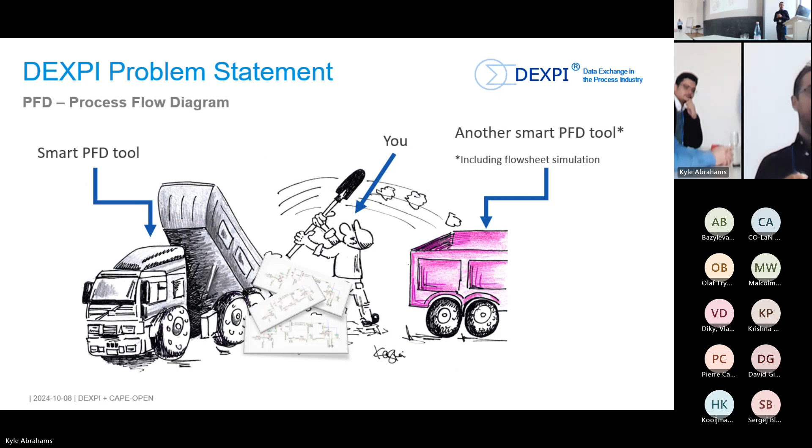So this is what we look at from the DEXPI perspective. DEXPI is an association—we have 10 to 20 full-paying members. We were founded last year in October, so we're one year old. We have a history, of course, and so far we've focused on the P&ID, the later diagrams in the engineering lifecycle. But now we're moving in the direction of process, where we have the PFDs as well.

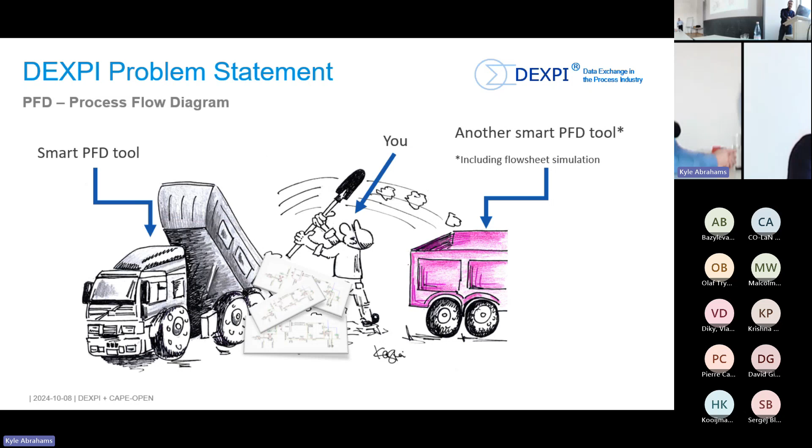This is where we want to start an MOU or cooperation, to look together with CO-LaN at how to enable customers to have simulation combined with PFD tools and P&ID tools, to cover more of the whole life cycle using digital tools. That's my part, and I hand over to David, who will give an update on what he started last year.

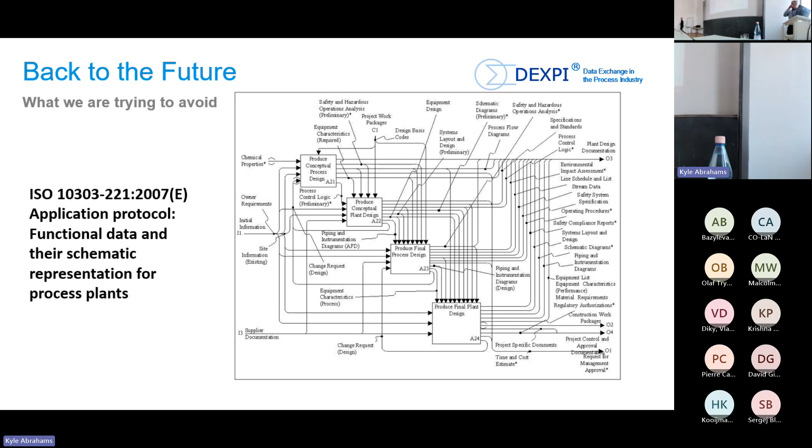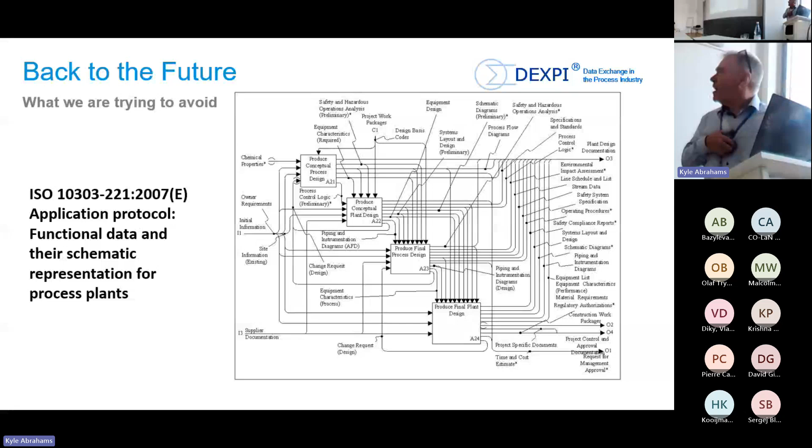Okay, so to motivate discussion, I discovered something lurking on my hard disk called ISO 10303-221:2007, which was trying to describe how we do process engineering. This diagram from hell is what we're trying to avoid by using DEXPI, where you have layers upon layers of documents flying in all directions in your project.

A lot of these slides were actually taken from last year, because last year I gave a presentation on what DEXPI process was, and came with some questions around CAPE-OPEN. What's happened since then is that a couple of people involved in process simulation have been prototyping, trying to see whether simulators can interact with DEXPI process. There are some results on the way which are quite positive—the people doing it are AVEVA and DWSIM at the moment.

Now, the lesson following up from Gregor's comment is that DEXPI is a data model, not just a data exchange format. He started off saying we need to do data exchange for P&IDs. What we see is that the thing more interesting for engineering companies is actually that we need a good data model for the plant.

And so I've got my drawing from hell, which shows complicated structures. But what I'm trying to show here is that DEXPI process, the standard for describing processes, and the old P&ID model, now branded as DEXPI plant, give you a way of defining a topological model of your process design and plant design that you can link together, and move through the phases of process design from concept through to putting the maintenance functionality you want on the equipment—using the classes in DEXPI process, and then the classes in DEXPI plant to create your plant model.

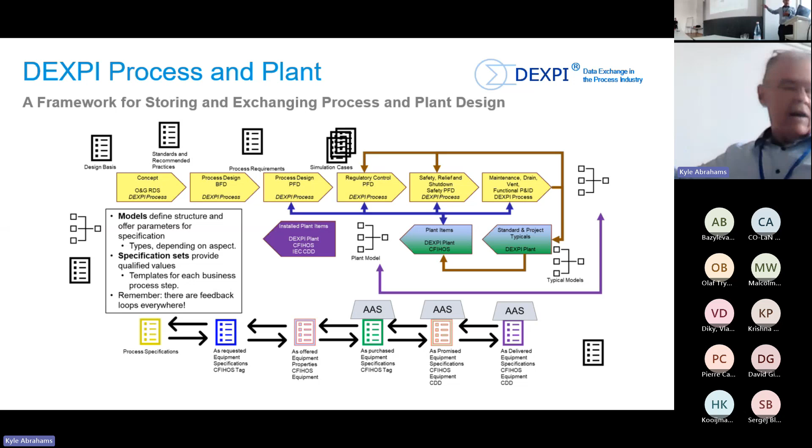You then take the specifications, perhaps throw them into an Excel file, then turn the handle on the simulator, and then the simulator has its own proprietary tool to throw those results back out into Excel, and then your cases are then carried onwards by whatever manual approach you have to put it into your engineering system.

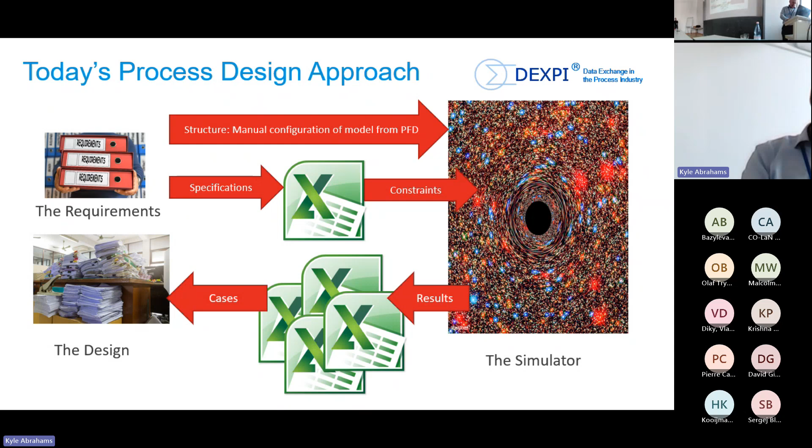The first way you look at it is, what does it do? That's your process design. That's where DEXPI Process helps you with that. Then the other aspect is, well, what is the plant? What equipment do you have there? And that's where DEXPI Plant, the P&ID model, is actually the thing that structures your information.

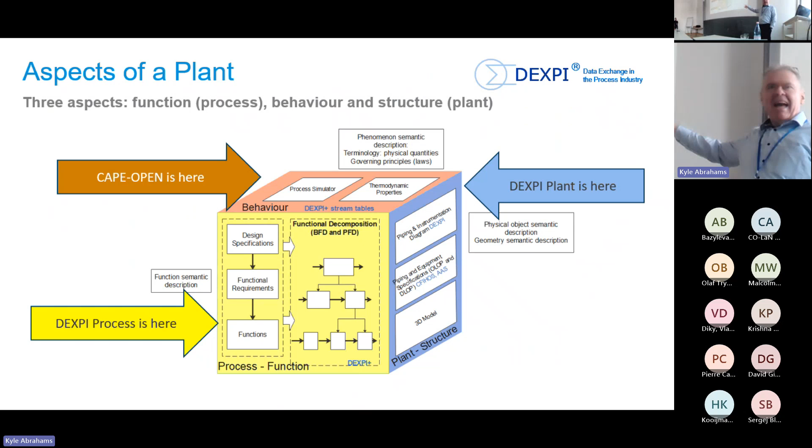But then the next question is, well, what does a plant do? Actually, how does it behave? And that's where simulation comes in. And that's where CAPE-OPEN is, about linking the process simulation and the thermodynamic properties to the process structure and the plant structure that you have.

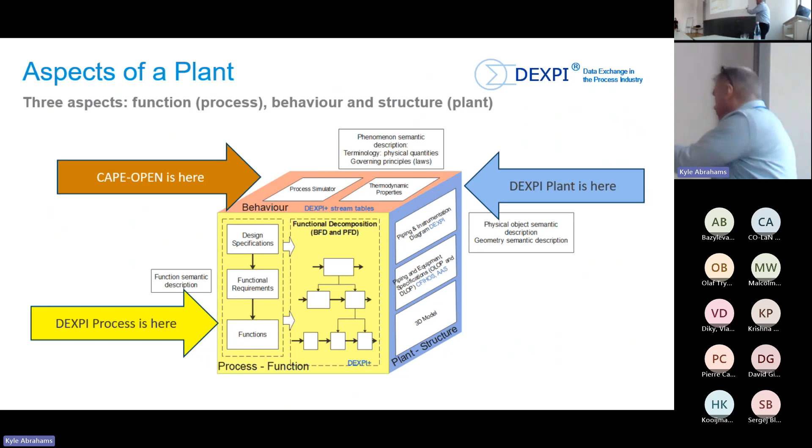Now, DEXPI Process is not rocket science, it's not a very complicated model. It's basically blocks with ports with connections between them. Sounds very familiar to simulation and to CAPE-OPEN. And we deliberately took the best out of various process modeling standards, SysML and CAPE-OPEN.

And there was a lot of background from people who've been heavily involved in simulators like Gregor and me into actually structuring the model. So what we have is a structural model consisting of process steps, read unit operations, with streams connecting those ports. What we also need to do on PFD modeling is to model a flexible stream table.

And so what we did in DEXPI Process is to build up a way of defining a stream structure for groups of thermodynamic streams based on a concept which is familiar to CAPE-OPEN, a material template, which then says what components are in that, and then you can additionally put in information about what thermodynamic methods you're going to use as a potential extension.

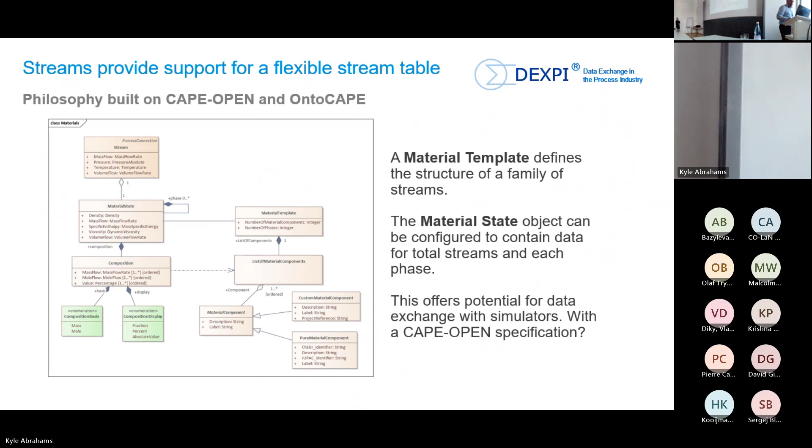Then we need some sort of reference data about process steps. And so what DEXPI Process at the moment proposes is a set of process steps, again, based on existing standards, that we believe cover large amounts of the process industry. That assumption needs to be validated. So we need help from companies who have their own libraries of unit operations to see where we need to supplement the reference data we have for unit operations.

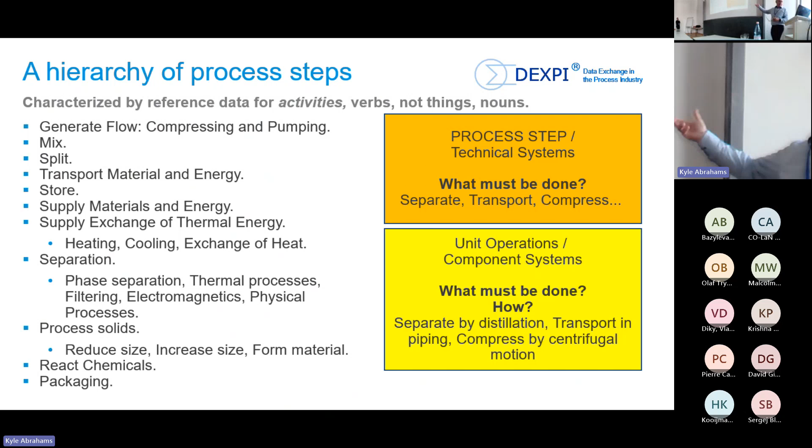So again, the slide from last year. We can use DEXPI Process files to store design cases. So the first thing we do is we define a structural model, which is a data set which says, I've got these unit operations, they are connected together like this. That then enables you to create similar files that just contain data.

And the first set of data sets you can have is actually data sets which contain constraints. And they can be used to define simulation cases. And then you can turn the handle, hopefully on a simulator, and create data sets containing results, which are the behavior sets.

Now, this is what you do generally in design now, except that your structure is a drawing, and there aren't very many smart PFD tools. And your characterizations or specifications are usually documents or Excel sheets, and your results now are usually Excel.

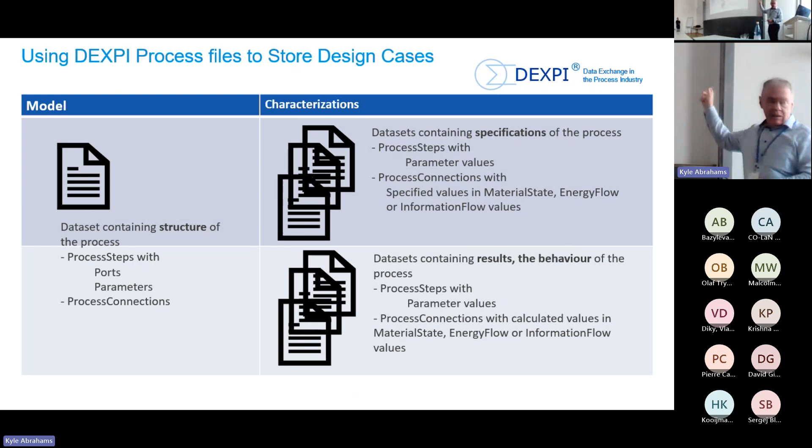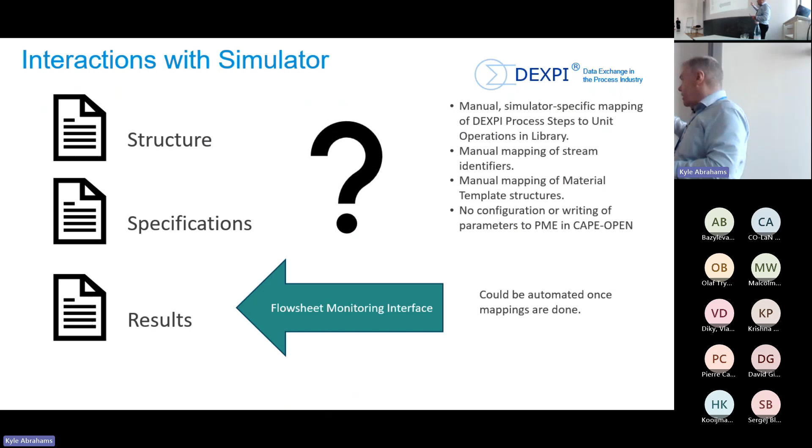So, how can we interact with the simulator? Last year, I had a big no entry sign on the ability to use structure and specifications. Progress this year is there's now a question mark there, which we see that it is possible to read information between certain types of simulators and what we're doing. We still see that there's a substantial opportunity to make the flowsheet monitoring interface talk DEXPI Process. That would be a fairly low-hanging fruit in the collaboration we're doing.

And the monitoring interface is there, and we've got information again from last year. We have these mappings at present between different DEXPI process structures and CAPE-OPEN objects. So our friend the process step, and to a certain extent the process step detail, relate to unit operation, ports to ports, and then the stream, energy flow, information flow map across to the material stream, energy stream and information stream in CAPE-OPEN.

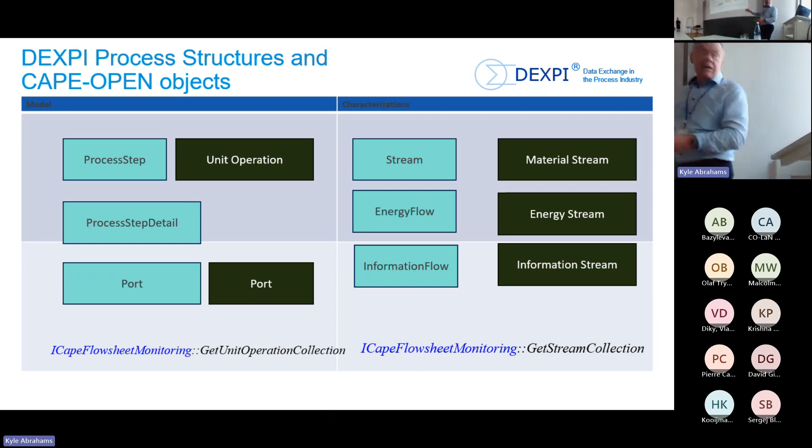So this is again from last year, and things which need to be addressed if you're thinking about how we relate process information to simulation. Every process simulator has a certain set of unit operations with their own local syntax. So you need to do a mapping between our process step types and unit operations in the simulator. We need to map ports and we need to map parameters.

If you do that, you're then in a situation to be able to get information out of the simulators into the format you want, and you could have the possibility to also then push specifications as case definitions into a simulator.

We also see the opportunity here that you can use DEXPI process structures as documentation for your thermodynamic data and project, the project basis you make for defining your thermodynamic models and data. We haven't got terribly much information about that, but I would propose that we can extend the DEXPI process standard to contain static specification data around thermodynamic properties. They'll be valuable for us. And we then have the mechanisms there to do some mapping across to your simulators.

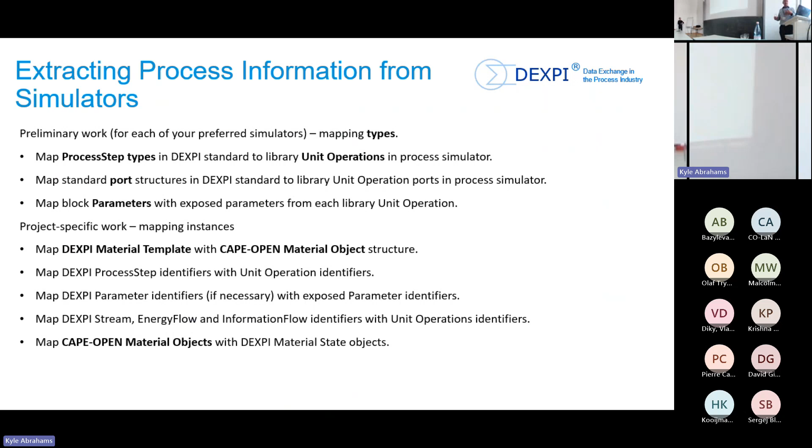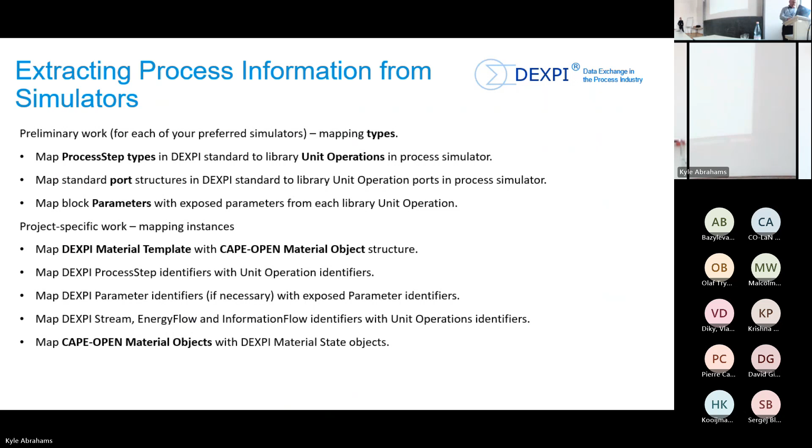So that's status. We haven't really come very far from last year, but there's some good results with some people doing some prototyping, which is very promising. I'd like to open a bit for discussion about how and where you can see that we can actually link these two things together. Presentation is now open for questions.

That's good. You already pointed out that in the direction from existing flowsheet simulation to DEXPI, flowsheet monitoring is the way to go. Make sure that all the unit operations are exposed there in DEXPI vocabulary. I'm a pump, I'm having this and this function, and a flowsheet monitor on top. This is an excellent business case to get the simulation vendors to implement support for flowsheet monitoring, because that will be a difficult step. This is always the difficult step in CAPE-OPEN, to get support from the software vendor.

Would you see that flowsheet monitoring would be the best way to? I could see that our friends, the software vendors, would say, okay, we'll just hack a script, a function that only does DEXPI. Flowsheet monitoring gives you access to all the streams, all the unit operations, and anything you want to query from there, and the flux between them, which is the information that's in the overall picture.

Did you miss anything in the monitoring interfaces which you would like to have, except for more the semantic type of unit object? DEXPI could take over. I think we'll have to ask the people who've been doing the implementation work. I haven't got my fingers dirty on that, so I can't make an assessment about that.